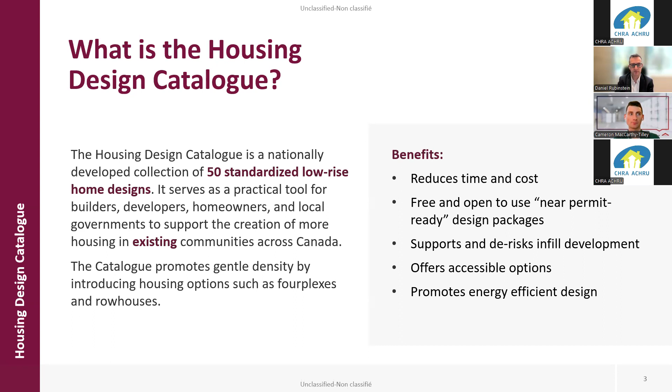For those familiar with the post-war catalog that CMHC released over decades, here are some examples from 1947 through the mid-70s. We have bungalow splits, 1.5 story. These are all single-family homes that were quite efficient, and you'll see these in communities from across the country.

A little fun factoid, Cameron and I both live in Victory Homes in Guelph and Ottawa, and we're working on the new catalog today, so that's a little extra inspiration for the two of us.

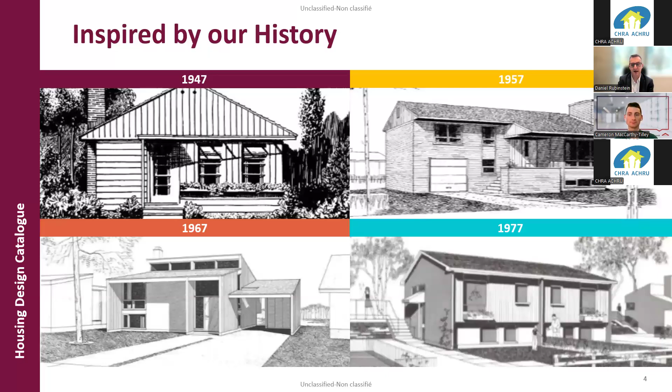But I did want to highlight, it's been since the 70s that we've produced a catalog. Today's catalog is really about the modern housing needs that we have in communities across the country.

So you'll see a variety of designs in the catalog, from accessory dwelling units. In some regions, these may be called accessory residential units, additional residential units, coach houses, laneway suites, or garden suites. There's a variety of terms, but we're talking about detached ADUs that can add additional options on an existing lot with room for an accessory suite.

Rows and towns is a category that includes various different strategies based on the region, but for the most part is about providing multiple units either side by side or in a stacked format that can repeat as 2, 4, 6, 8, 10 units depending on the lot size.

We have fourplexes, so these are single building fourplexes in each region, and typically there's a narrow fourplex for a narrower lot and a wider fourplex for a wider lot. We did commission some work at the start of the catalog process to look at standard lot sizes in each region across the country, and those lot widths and depths tend to inform the narrow and wider fourplexes, as well as some of our other designs.

And we also have sixplexes. So the design you see here is the Ontario sixplex. It's quite a compact built form, providing 6 units on a similar lot to a narrower fourplex in the Ontario context.

Daniel, sorry to interrupt, we see your computer's about to restart. Thankfully, my computer is not about to restart, so I'll continue here.

The Ontario designs: fourplex 1 is a 1-bed, 1-bath ground floor unit that can also be a second unit or accessible ready, plus a 2-bed and a 3-bed family size unit. Fourplex 2 has a different unit mix, with 4 units between 2 and 3 bedrooms over 2 stories.

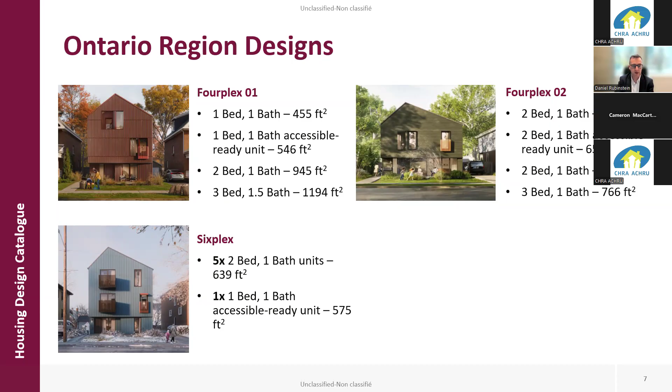Think of fourplex 1 as a more narrow urban lot, maybe a 10 or 12 meter lot width, while fourplex 2 is a more standard 50 foot frontage lot you'd see in post-war suburban communities. We also have our sixplex, which has 5 2-bed, 1-bath units and a 1-bed, 1-bath accessible ready unit. That gives you a sense of the Ontario designs.

I'll quickly go through the BC designs as well. We have our accessory dwelling unit, very similar to the Ontario design, a 2-story ADU with an extra bedroom, shown here as a laneway access unit. We also have a larger duplex, front and back, similar to what you might see in the Vancouver market right now.

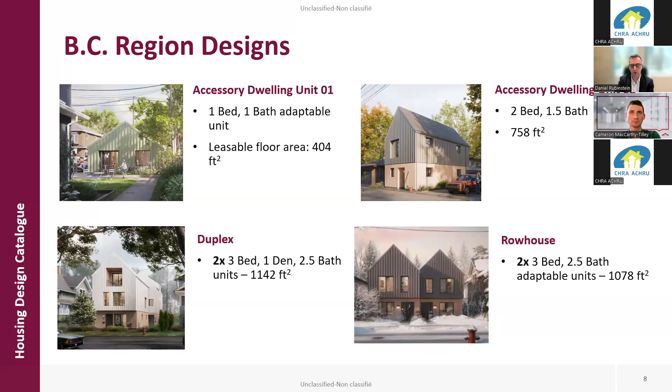We have a row house designed with adaptability in mind from the get-go, which can be repeated side by side on a suitable site. For our fourplexes, we have a narrow fourplex and a wider lot fourplex. There are some differences in unit mix here compared to the Ontario designs, a function of the lot size we assumed and the approach of the architect.

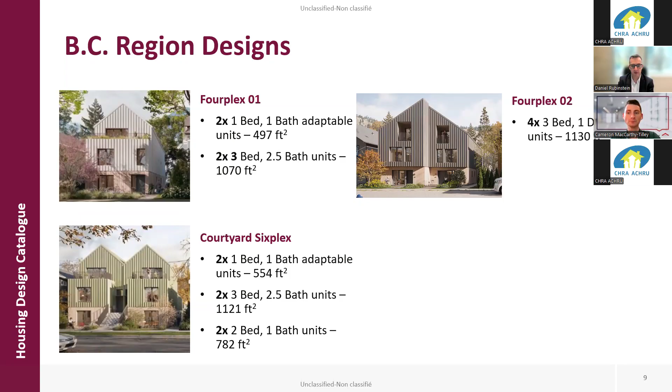We also have a courtyard sixplex. Rather than being a single building, it has a front building with 4 units and a back building with 2 more. One neat feature of the BC designs: since we have a lot of sloped sites, the architects designed approaches where the front and back units can step up and down on the site to take advantage of slope. We've seen some experimentation with that already, which may be useful for anyone looking at these designs in British Columbia.

I'm going to share a little bit about the core design principles for the catalog. The first key principle is that these designs are regionally informed, meaning they account for climate zones, construction methods, and typical zoning and building code in each jurisdiction. We have separate architecture and engineering teams in each region, with many sub-consultants, who developed each of the 7 chapters of the catalog, so it's 50 designs across 7 regions.

We know how important it is to have a catalog with regionality. The images on the bottom left are designs from our chapter for the Yukon, NWT, and Nunavut. One unique feature in that region is we have designs for both municipally serviced sites and tanked service sites. We also have designs, especially for the tanked options, that use a multi-point foundation appropriate for contexts with permafrost.

Let's give one example of the differences: our Quebec chapter uses 0 lot line options and has a different look and feel consistent with architecture in Quebec. So I just want to underscore there's a lot of regionality in the catalog.

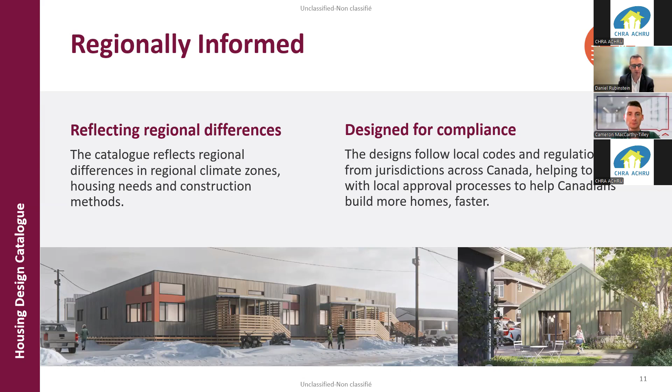In terms of adaptability and accessibility, we worked with Accessibility Standards Canada on an approach to accessible ready and enhanced accessible designs. Accessible ready designs can be converted to an accessible unit much more easily than homes designed without adaptability in mind. We're looking at things like location of structural, mechanical, electrical, and plumbing, and having kitchens in a location that can remain if the unit is converted in the future.

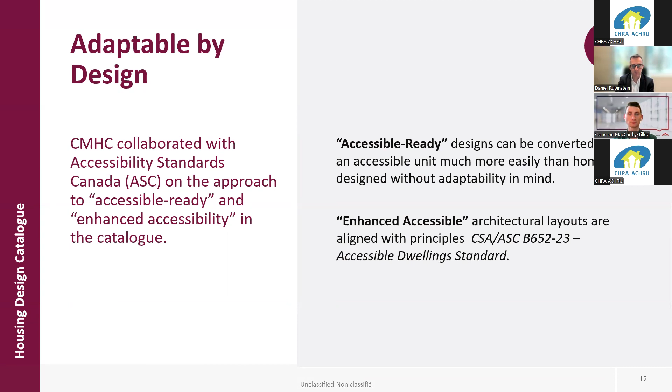We also have enhanced accessible architectural layouts aligned with the principles of CSA B652. Cameron's going to show, after the slides, when we walk through a design set, how these principles have carried into our design packages. This really was an important component of our feedback on the catalog and our design work with the architects, so we're quite pleased to provide those solutions from the get-go for a variety of users.

In terms of energy performance and climate, the key point to take away is we did target a higher than code minimum energy efficiency performance level, so NBC 2020 Tier 3 in British Columbia, Step 4 of the Energy Step Code. Users can modify these packages to their preferred energy performance tier, either go down to code minimum or look at Tier 4 or net zero options. But we're confident that these designs do meet Tier 3 and Step 4, and we provide energy modeling resources to support users with determining their energy performance level.

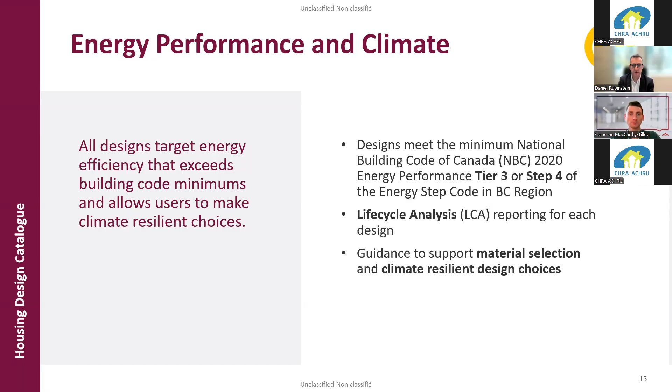We also have life cycle analysis and other guides to help with this as well. So that's another key element of our design process. And the last one I'll talk about here is financial feasibility.

Obviously built into the notion of using a standardized design is the ability to take advantage of a predictable cost, a faster process ahead of construction. And in speaking with the team at CHRA, I think this is really one of the places where the catalog might have real value for all of you and your projects during that pre-development phase.

So we have Class B construction cost estimates. These are based on the prototypical plans that you can now download. They don't include things like site-specific conditions - if you had a serious slope or some excavation that we can't anticipate because these were designed without a site - but they do take into account all of the core building elements and provide a reliable starting point for a pro forma. And these cost estimates are provided with a low and high end range.

We know there's a range of factors that will go into building. We expect that users who use the catalog designs and repeat them over time will be able to achieve efficiencies on that basis. But material selection obviously is a variable that can change costing as well.

As mentioned here on the slide, absolutely standardized designs can support prefab and offsite construction. These were designed as stick built with the potential for hybrid construction. We know that potential is there, and if you're using those solutions, you may be able to achieve construction savings and or time savings, which has an impact on the pro forma.

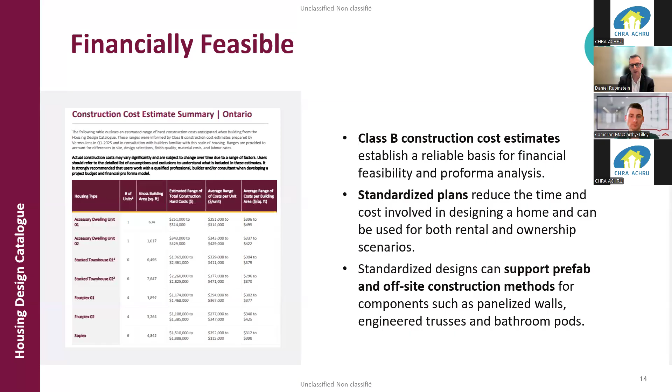So what's on the left of the screen here is just a snippet of the construction cost estimate summary. There's one provided for each region. There's also a handy table in each of those documents that gives a breakdown of the unit mix, leasable square foot for each of the units, and gives all the details that you need to understand what's in and out of the construction cost estimate.

Okay, so earlier this year in March, we released the summary packages, and you may have seen this back in March for the designs. At the time, we released our 2D and 3D representations of the designs, floor plans, and illustrative renderings. I'll note the renderings are just one expression of these buildings. Users can really make their own look and feel based on cladding selection, color, and other aesthetic changes. But we did ask our architects to provide one expression on the design, so that's what you see on the website there.

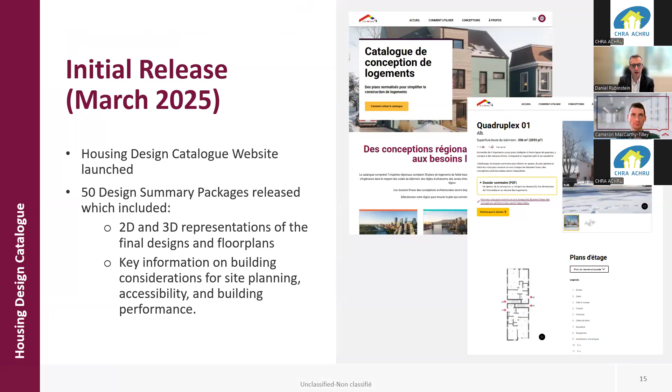And this information has stayed constant for our full release, which happened last month. So you can now go on the website, select designs, and Cameron's going to show you exactly how the website's laid out, and download architectural and engineering drawings for all 50 designs in various formats - so PDF, CAD, and BIM - our energy model template and guidance, and our design summary. So those are all available for individual designs.

And then we have technical supports that are relevant for any user of the catalog, so the user guide - I'll get into these in a second. We're also going to release a regional site plan example soon. We're working with our municipal partners to make sure we get this just right, but basically it'll help users understand if you have a lot of a certain dimension, you're interested in a certain design, how might that site plan work? How might you accommodate parking and other requirements on a given lot dimension?

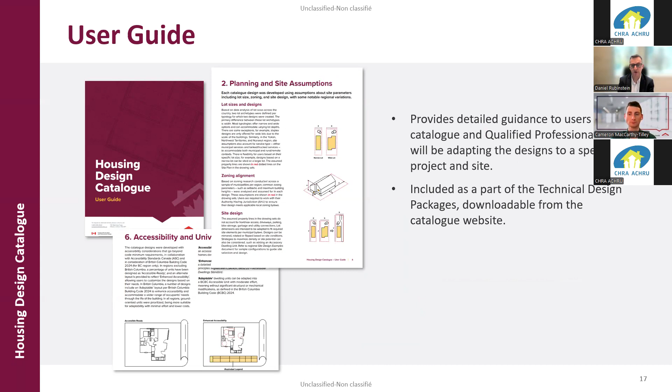So here's a snapshot of the user guide. I really recommend folks take a look at the user guide for an understanding of our design principles and the steps that are needed when using these near permit ready designs, working with a qualified professional - that could be a licensed architect, engineer, or designer - to finalize the designs for a specific site and project. So the user guide goes into things like our planning and site assumptions, accessibility, which I've spoken about already, adding or extending eaves and overhangs, looking at alternative approaches to foundation, adding basements, energy performance. So a variety of topics really intended to be a helpful starting point to contextualize what the design packages have, what's left to do, and how you'd work with a qualified professional.

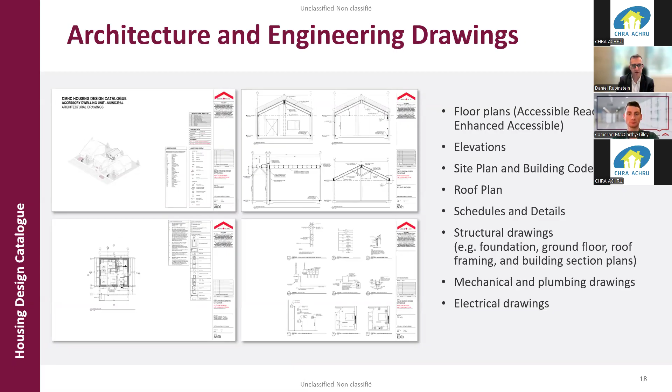I won't spend too much time here because Cameron's going to do a walkthrough, but just to give a snapshot of what is in the drawing packages when you download them. We have building performance reports that for each design take a prototypical location and do an energy model, showing operational energy and embodied carbon assumptions, assuming a performance level of Tier 3 or Step 4 in BC.

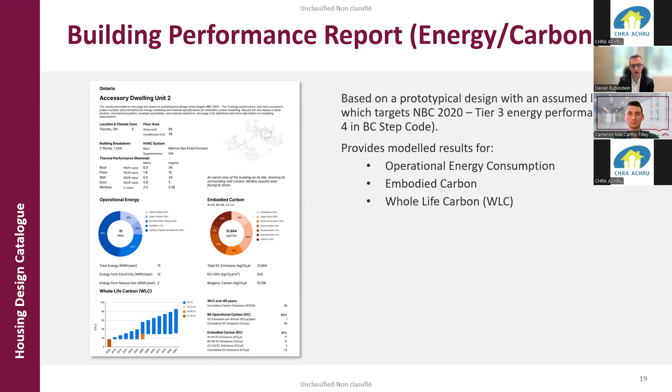I can share a couple of strategies we've taken as a good starting point for resilience across the catalog. All of our designs have dwelling units at grade or above. Users can choose to add a basement unit or basement storage, but the prototypical plans are all at grade or above, which helps when locating these designs in areas with flood risk. Likewise, our designers have focused on a good building envelope, both for occupant comfort and energy performance, which also has resilience benefits.

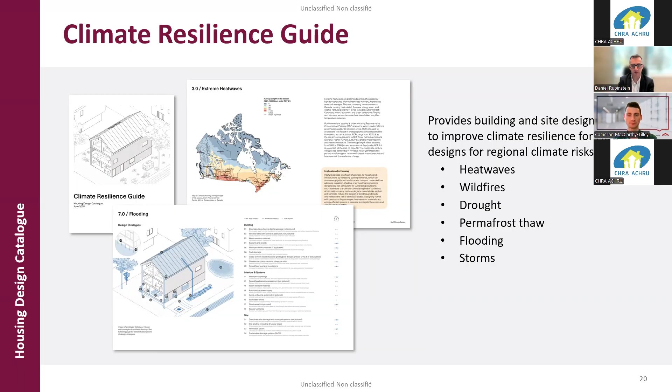We have mechanical optionality that includes heat pump options and mechanical cooling options. So all to say, we've taken some high-level design approaches in terms of resilience, but this guide is intended to help with the broader site context that we don't have visibility into with the prototypical designs.

These are on a relative basis amongst the various options. The firm that was part of our broader catalog team prepared the resilience guide and this materials guide for users, so hopefully that's a helpful added complement as well.

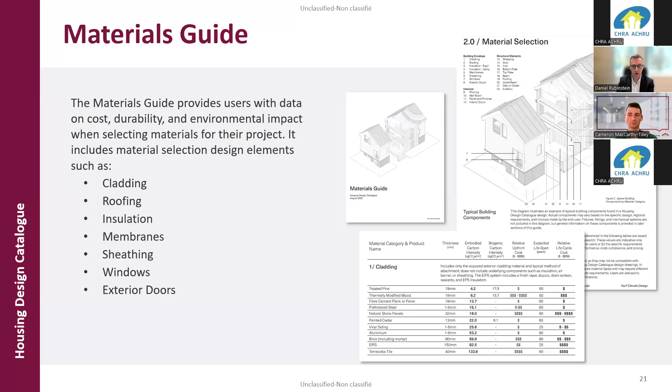So how will the catalog work? I think this is probably the most important question we get in meetings and presentations. These designs are not yet fully pre-approved or done for a site—they're prototypical. We've made assumptions on elements like grade and limiting distance to a neighboring site or lot line, but they're best described as near permit ready. Users will need to work with a licensed qualified professional to finalize their design, creating what our terms and conditions call a derived design, and then make a building permit application.

I like to think of it this way: if you take a design like ours with a very similar lot condition, lot dimension, and proximity to neighboring buildings, and use a design with a slab on grade foundation, keeping that foundation type, then the scope of work left for the qualified professional is to ensure all the elements make sense for that site. If you need to make more extensive changes, the scope of work is greater. In an ideal scenario, we've taken a big head start in that design process and are providing a free to use tool for end users that can make it easier and cheaper to build these kinds of homes.

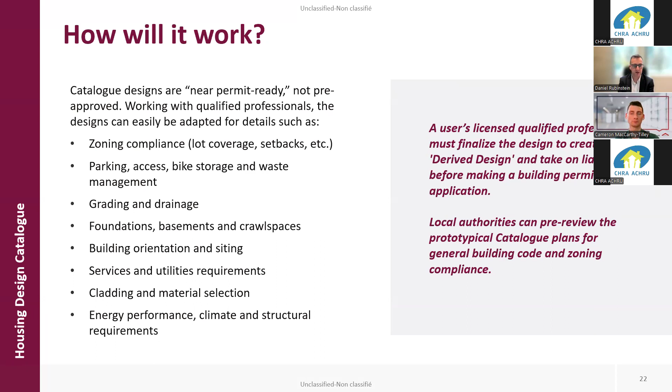Obviously, servicing and utility requirements with hydro connections can create some limitations on a site, so that'll have to be looked at for each project. And then cladding and material selection, these are things that we've left as placeholders in the design packages and need to be confirmed by users.

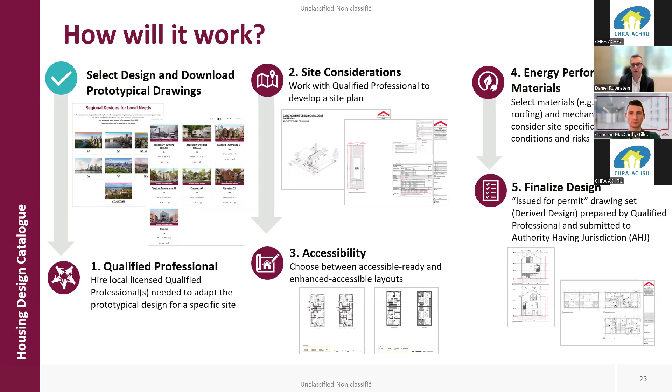We're really confident that we can save all that time, but there is some work to do that's can only be related to a specific project and site.

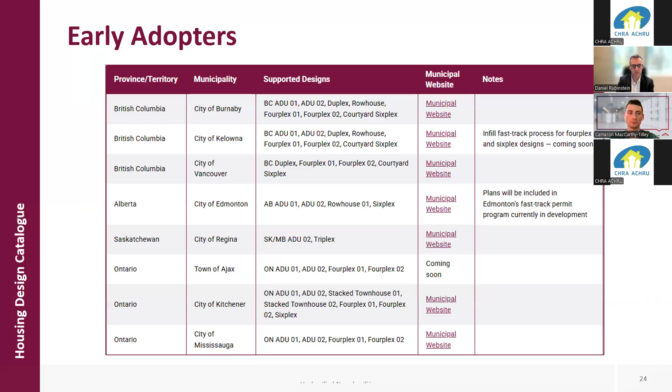I'll also highlight the other cities in our early adopter cohort, Toronto, Saint John, Halifax, and Whitehorse and Yellowknife as well. These are all cities that have pre-reviewed. Really encourage you, take a look at our website, look at the municipal websites for each of these. If you're operating in these communities, really hopeful this will help provide more certainty if considering using these designs for a project.

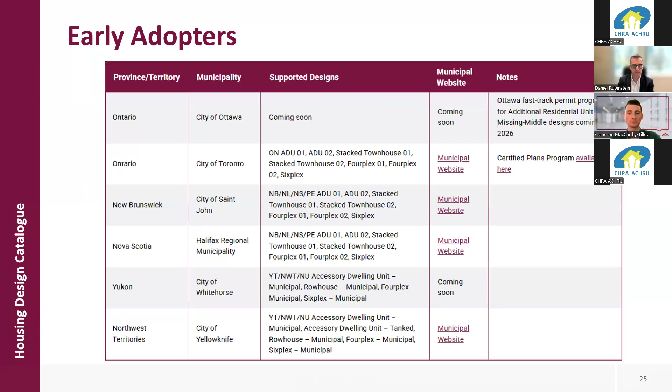Okay, so I'm going to sum up here what I've shared so far, and then I'll pass it off to Cameron. So what is the catalog? We're a free-to-use standardized design tool. It's 50 designs across 7 regions, focused on gentle density and standardization for ADUs, rows, plexes.

Really encourage folks to start with the region that you're operating in. That will provide you a package that aligns with your zoning code, climate conditions, and construction methods. If you want to get really creative and look outside of region, that is possible.

It does raise the bar for the kind of work your qualified professional might need to do. You may not be able to benefit from a municipal pre-review the same way as working in your own region, per the last two slides, but it is possible. And consider the resources that we've provided in terms of energy performance, accessibility, and financial feasibility as well.

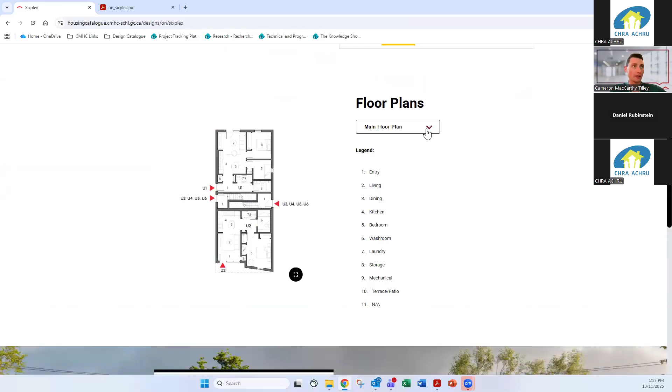We'll dive into that specific design. For each of our designs, if you click on it, more information is brought up on the webpage. You can see it provides a rendering, a 3D AXO view of the building itself. Lower down, floor plans are also provided that you can click through to see how the building has been laid out. As Daniel was mentioning, that also shows the base accessible ready designs as well as the enhanced accessible layouts, where applicable. So those are the floor plans.

On each design page, I'd like to highlight that there are a couple of things that can be downloaded. The first, highlighted here, is the summary package. I pre-downloaded this here. If you click on download, for each design it provides key building stats, including number of units, number of bedrooms and bathrooms per unit, information about the building geometry such as its height, roof midpoint height, width and depth of the building, and footprint.

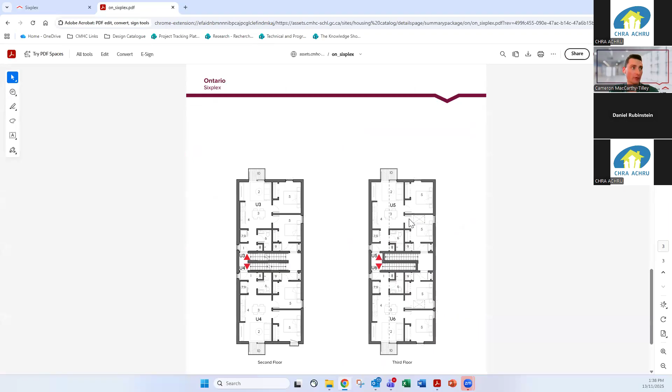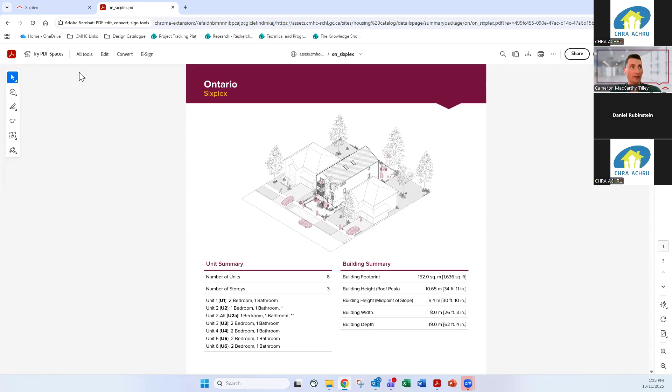Further down, it also provides those floor plans again. There's one of these documents available for each of our designs that you can download from the website. They're a good starting point just to explore the designs and learn some high-level information about them. Then at that point, you can decide if you'd like to learn more and download our full technical package, which I'll go into now.

If you go back to the main design page, you can click on the technical package. If you choose to download this, it's basically all of those information and resources, drawing files, energy modeling files that Daniel was mentioning in the slides. You click on download package, and it brings you to our user terms and conditions page. In order to access the actual design files, you'll need to review and agree to our terms and conditions, input some contact information such as your email, and then click accept and download.

I've pre-downloaded this one just to avoid any technical issues, and I'll show you here. When you click download after accepting the terms and conditions, you'll get a zip folder with all of the design files. Once you unzip the folder, you will get what is shown here, and I'll quickly walk through what is in that folder.

Might be hard to see. I'm just trying to make that a bit larger.

In each folder for each design, there is the building information file, the BIM files for the design, which would be useful for architects and engineers looking to work with the files. There's also all of the AutoCAD files, arranged by design discipline, so the architectural drawing files, mechanical, electrical sets, and the structural drawings. For ease of finding what's in there, we also have a list of those drawings provided in that folder. So that's the CAD files.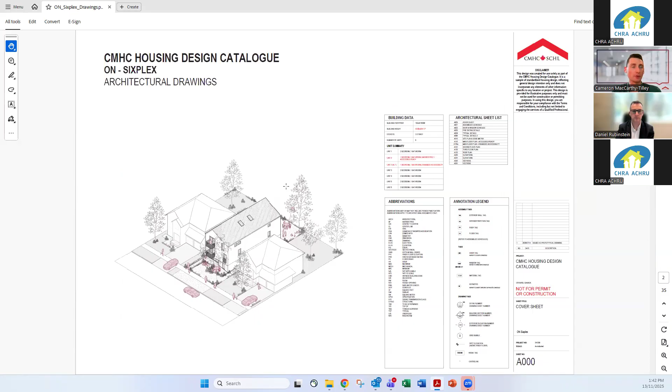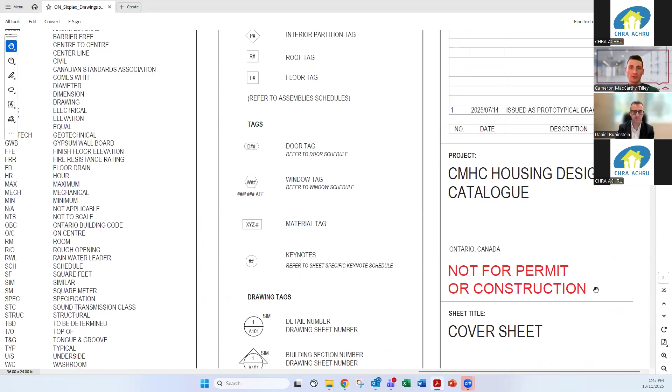As you work your way through -- actually, sorry, I'll stop there. One thing I do want to highlight is this 'not for permit or construction' marking on this drawing set. It's important to know that the PDF drawing sets we're putting out there are not ready for construction immediately. I think Daniel mentioned that they're about 80 to 90% of the way to being ready for use. So you can't really print off this PDF and submit it to your building department as is. You do need to work with a qualified professional to make necessary modifications and revisions to the drawing set for your actual site. Just wanted to highlight that.

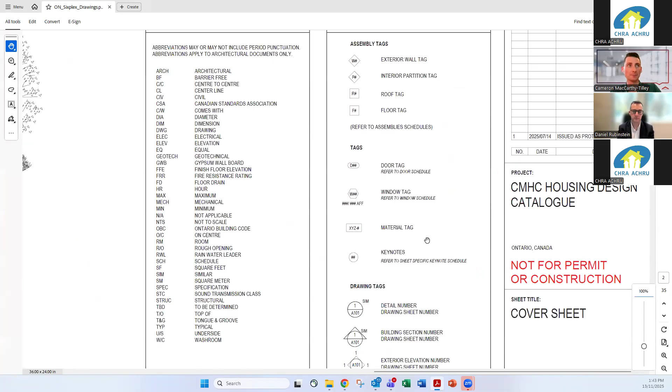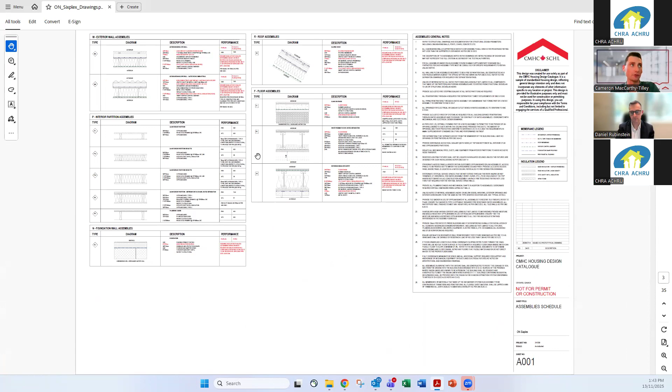I'll work my way through the architectural set here. The first page you get into is your building assembly, so your wall assemblies, roof assemblies, floor, other partitions. I'll zoom in on the wall assembly just as an example. There's both a W1 and a W2 assembly. Obviously these will vary by region, but for this one there's two provided: one being the exterior wall, and the other being a non-combustible version of that wall.

One thing I'll highlight about these assemblies is that some of the text is in red. The reason for that is these items in red are effectively what a user and their qualified professional will need to review, make design selections for, and finalize for their use of the design. So you can see the exterior cladding layer is left as a placeholder, a lightweight cladding placeholder. That just means the end user has to go and actually pick what cladding material they want to work with, review it with their qualified professional to ensure the structure can handle the loading of that cladding material, combustibility requirements are met, things like that. But it is up to the user to select.

The other thing I'd like to highlight about these assemblies is the insulation values. You can see we are showing an exterior continuous insulation layer as well as a stud cavity insulation. The specific insulation materials and products are not defined in our drawings -- that's up for the end user to select. But we have provided the thermal performance values, R values, you would need to achieve if you want to align performance with what we're showing.

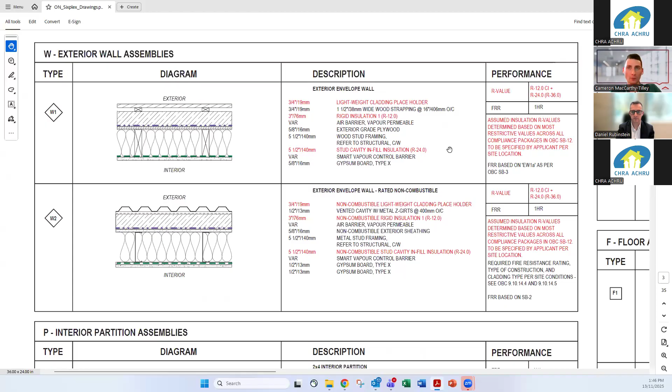So yeah, those are there. Users will need to review and finalize exactly what the insulation will look like, but it's there for them to start with.

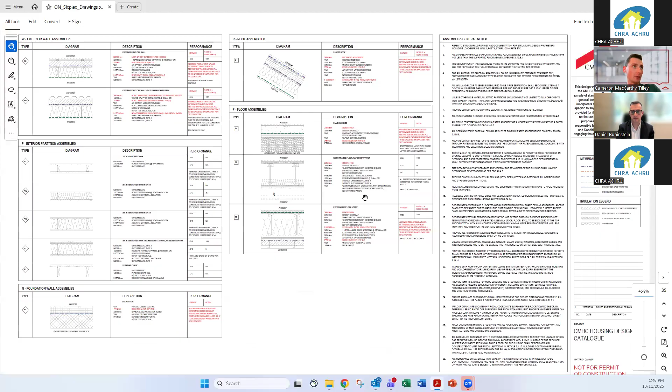The roofing assembly is a very similar approach to the walls, so I won't dive into those too much, but I'll move through now. You can see we have door and window schedules with dimensions and other information provided.

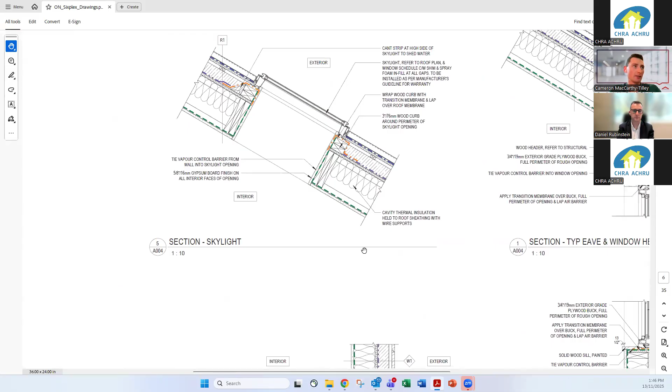Key details for fire rating and other typical details. I won't go through all of these, but just as an example, you can see typical window head details, skylight detail, soffit and door head detail. So there's a number of key details you need for construction, typical to what you'd see in a set at this level of detail.

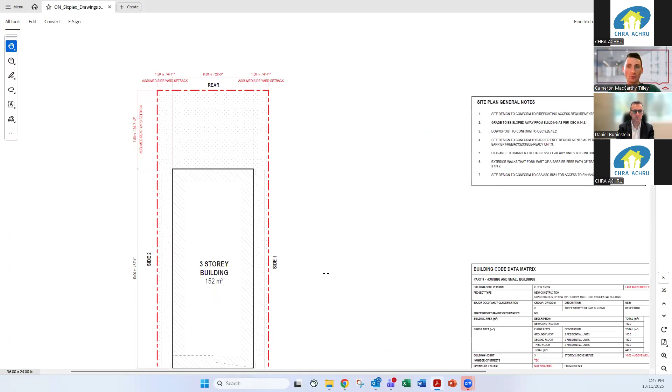Working my way through more details. This page is our site plan page. I'd like to highlight a few things. You can see that we show a very generic prototypical site plan in this set. Obviously in practice, when you're using these designs, your site may not align exactly with these dimensions, but we're showing this as a means of conveying what our assumptions were for the site, our assumed setbacks, and things like that.

In practice, when someone is using these designs, they'll have to replace the site plan with the actual dimensions of their site, review and confirm the setbacks are in compliance with zoning, and things like that. A lot of questions we get are, can you only build these buildings on a site plan of this dimension? The answer is no. If your site is bigger, this design will still work. Even if it's slightly smaller, depending on your zoning and setbacks, you could potentially make it work. But it's something for the user to work with a professional to confirm through the design process.

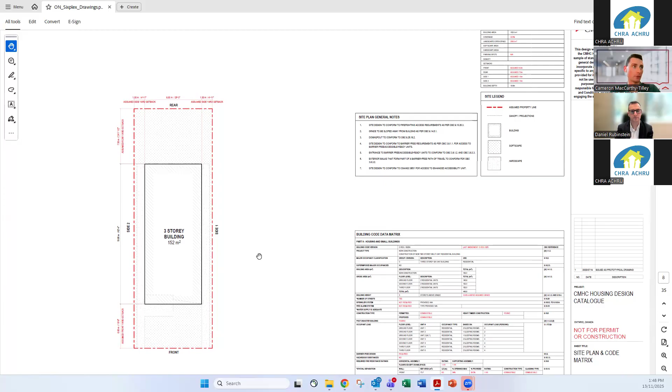The next thing I'll show on this page is our code matrix. This highlights a lot of the building code assumptions that went into the design. Again, the items in red are something the user will need to verify with their qualified professional. Depending on your site, location, and how close you are to other buildings, you'll need to look at your calculations for spatial separation, limiting distance, and things like that. But we've provided this as a starting point for users to work with.

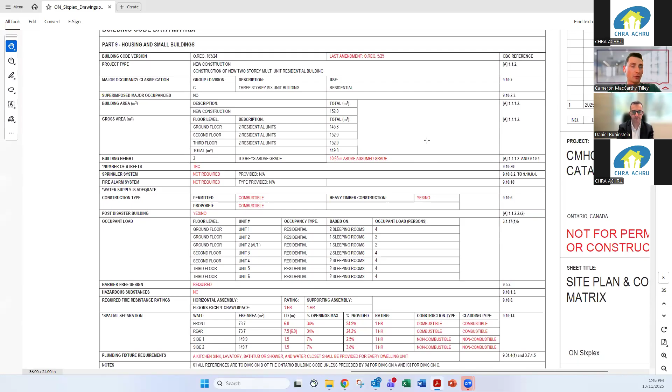I'll leave it there on site plan and continue through. The next thing we get into is our floor plans. The first two floor plans are for the ground floor. The key thing I'd want to highlight is the accessible ready and enhanced accessible versions of the plans. Daniel mentioned these earlier, but effectively we've provided two different floor plan options for the ground floor in this design.

The first is accessible ready, meaning the design, actually unit 2 on the right here, can be easily converted to a layout which would align with the principles of the B652 accessibility standard. So it's adaptable in that kitchens and bathrooms wouldn't be moving around too much; limited movement of walls would need to be done to align with that accessible layout. This accessible ready design would also comply with the code minimum accessibility requirements of the region, so if you built this unit layout as shown, you'd be complying with code accessibility.

I'll try to show the differences between the two layouts. If you look at the next sheet, it's probably a bit tricky to see, but zooming in, what changed is in order to get the clearances in the bedroom, the closet had to be removed. We're showing clearances in the washroom, which would be a roll-in shower, as well as in the kitchen, similar thing. The laundry changed from a stacked washer-dryer to a side-by-side, more accessible version of a laundry.

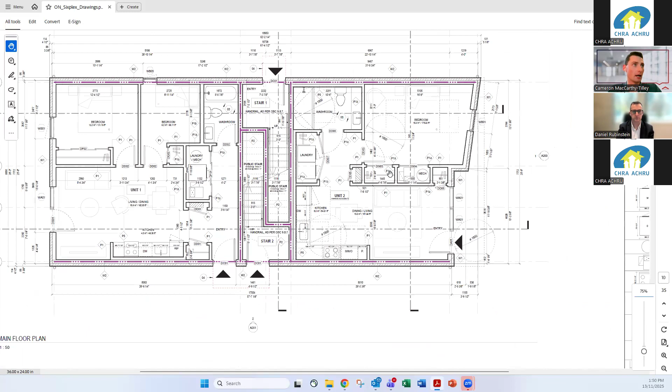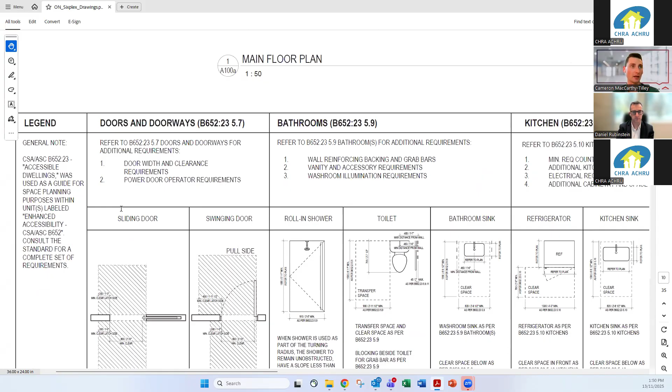If you look at the sheets one after the other, you can really see the full differences of our layouts. The other thing to highlight on these enhanced accessible sheets is that we provided a very detailed legend about very specific items within the B652 standard and how users would need to comply with them, including dimensions and other key notes.

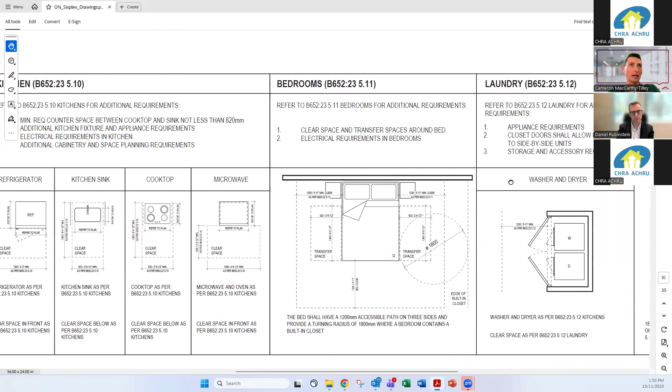You can see there are legend items for doors and doorways, washrooms, kitchen, bedrooms, laundry, and closets. We worked very closely with ASC on developing this legend, and it was based on their standards, so it's a very useful tool for users looking to align their designs with that standard.

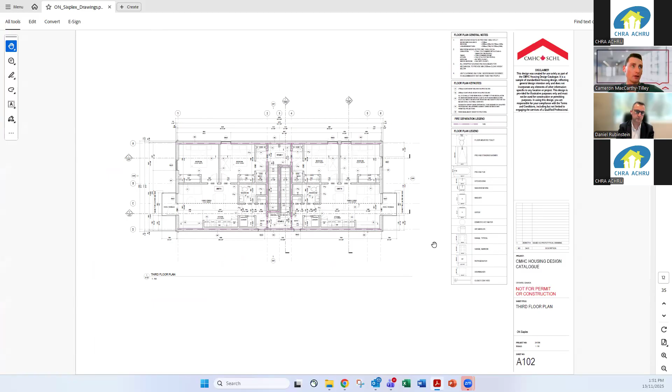Okay, I'll keep going through the floor plans, second floor plan, third floor plan. These ones do not have accessible layouts, just the one standard layout. We also have our roof plan.

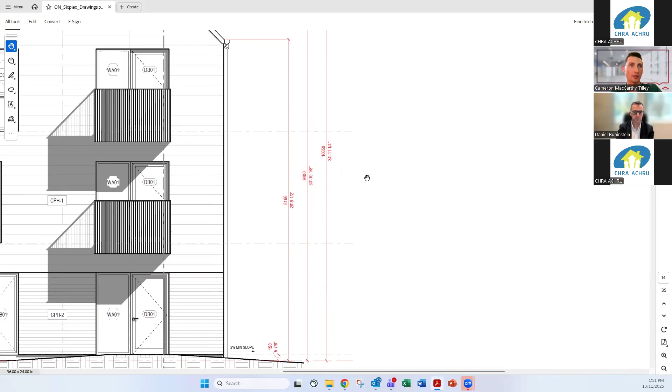The one thing I'll highlight about the elevations is that building heights are shown in red on the right. These dimensions are based on assumptions for grade, so these exact height numbers will need to be confirmed based on the actual specifics of your site. Is the grade sloping? Is it lower? The numbers might vary a little bit in practice.

Continuing through the elevations, we have our building sections as well. You can see that fire separations are shown in purple lines. The one thing I wanted to highlight on the sections is the foundation, which is shown in a dashed red line. The way foundations have been approached in our design packages, they're more fully detailed in the structural set.

We've made assumptions to design a prototypical foundation type for each building, done without knowing the exact site or soil conditions the building will be built on. So the reason we're highlighting it as an item in red to be verified is that, depending on your soil conditions, the foundation type we're showing may not work. It's up to the user to work with their qualified professional to review the foundation in the context of their site and soil conditions, to make sure it will work, modify it, or design a new foundation if needed. But it is possible it will work if the assumptions align with the actual site. The full foundation design is detailed further in the structural set.

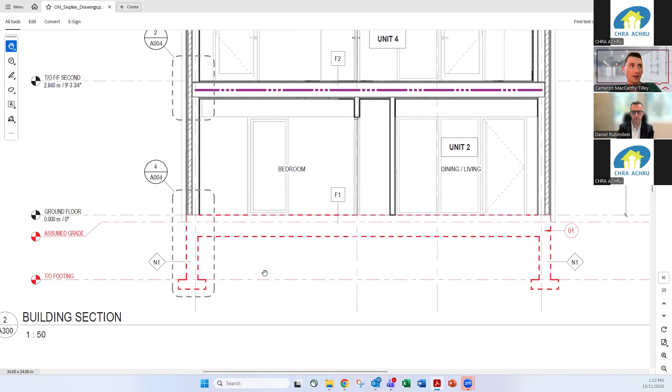So that's sections. Coming through, I'll finish off the architectural there and get into the structural.

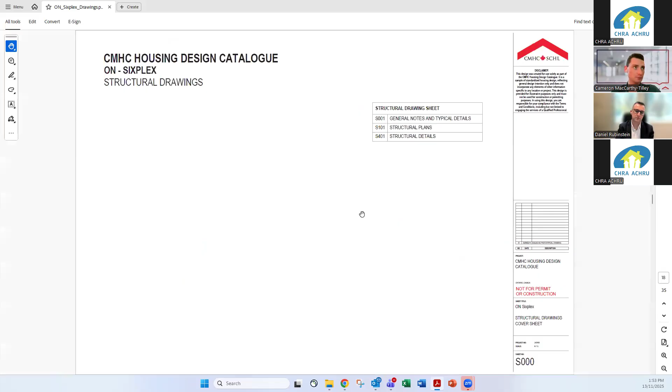There's a lot of information on this page, a lot of text. I won't bore you with all of that, but I'll show you a few key things. One would be the assumptions for climate conditions and design loads in the structural approach. As I said earlier, each region uses a different structural engineer as per their design team, so the approach varies a little depending on what region you're in. But for the Ontario designs, the structural engineer made a worst case design assumption for your snow loading, wind, and seismic loading.

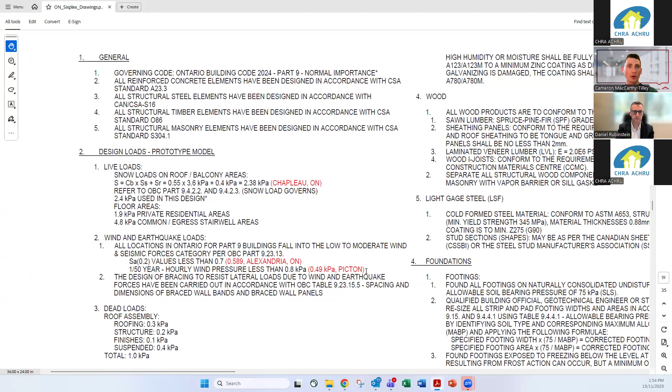You can see here that the items in red are the locations for the assumed snow loading, seismic, and wind loading. Given that it's a worst case scenario, the structural design will work effectively anywhere in the region because worst case loading was used. Users may consider value engineering that down if they wanted to, but that's up to them - they can proceed with the design as is, working with their qualified professional. So that's structural loading assumptions, key details, and other specification information provided on the sheet.

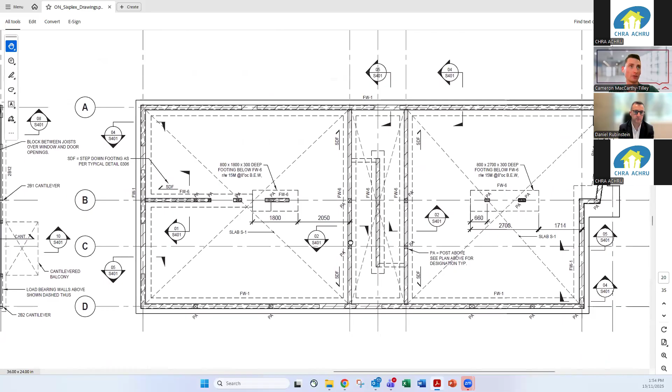There are the structural plans for framing provided on the next sheet as well - framing and key structural members, as well as the foundation layout too. That's typical across our sets. Key structural details are provided as well, and that wraps up the structural set.

The next and last part of the drawing set gets into the mechanical, electrical, and plumbing. To start this section, for each of our regions and designs, there were different options included for mechanical HVAC systems. Depending on what region you're in, there are different combinations of electric and gas systems, furnaces, heat pumps, and hydronic systems. You'll have to look at the specific designs for that information, but just know there are different options for users to pick from. As we walk through the set, you'll see there are different specification pages for each of those options.

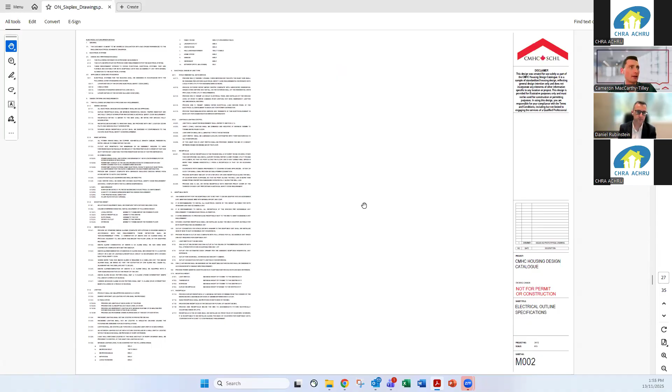So there's a base option, alternate option 1, 2, and 3. The Ontario set has 4 different HVAC options. There's a lot of text in these specs, so I won't go through that, but just note that they are there. And then electrical specs are also provided.

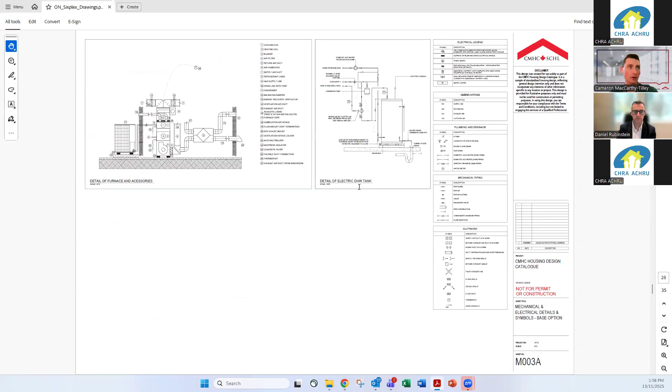After that, you get into typical installation details for each of those HVAC system options. Similar to the specs, there's one sheet provided for each of those alternate options, starting with a furnace and electric hot water tank, and it gets into a hydronic system as well after that.

Given that there are different mechanical options provided in the sets, users will have to pick which one they want and finalize that design for their climatic location. Things like heat loss calculations, energy efficiency summary, and final mechanical unit sizing will need to be done as a final step to get this design to permit.

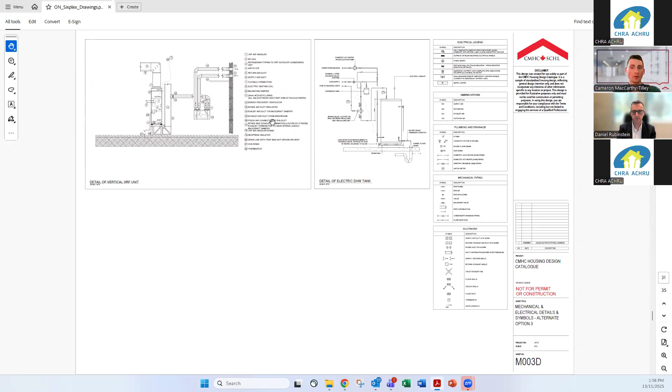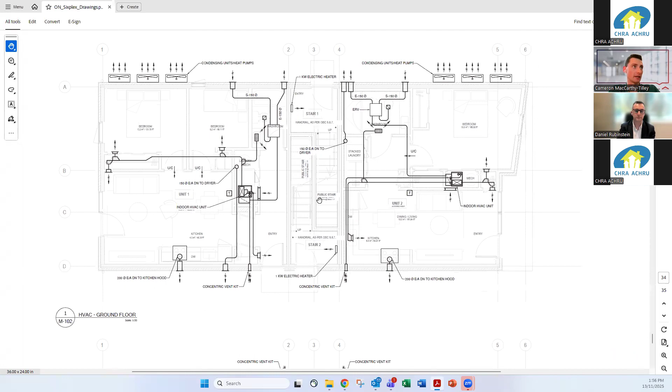The last things I'll go through in the set are basically layouts for plumbing, electrical, and HVAC for each of the floors. You can see that plumbing and electrical layers are provided for each floor, including the third floor, and similarly HVAC layers showing locations of units, ductwork, and things like that.

And that basically takes me to the end of this set. I think I'll stop it there. Daniel, let me know if there's anything else you want to add to this, but I'll pass it back to you. I know there were some questions in the chat and Q&A, and one of them was on the multiple options for HVAC systems.

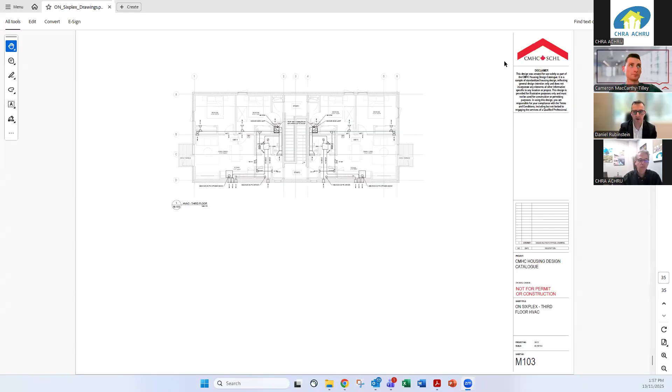You can just highlight quickly, Cameron, just the higher performing options, the full electric option, just for everyone's benefit.

Yeah, so there are different options. The exact optionality depends on region, but we tried to show a base option that was very commonly installed within the region. We did that in consultation with our architect and our mechanical designer. But then each region would show different options, so there would typically be something like a higher performing option involving a heat pump, or an all-electric option shown as well. They're all laid out in the sets for users to pick from.